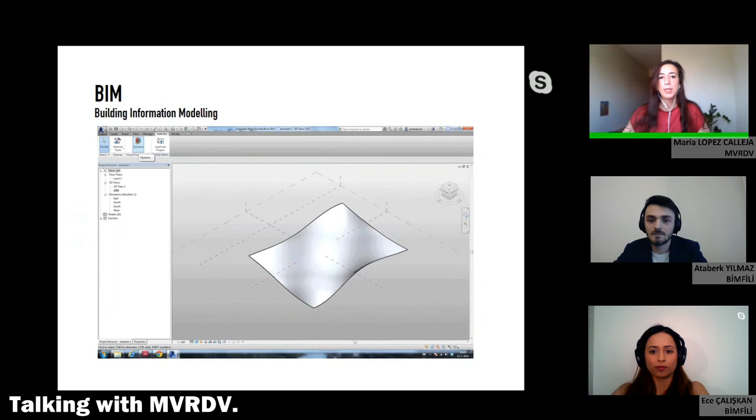So I would like to explain to everyone what BIM means for MVRDV, with 4 main keys. One is to define it as data, because for us BIM is a datascape model, and we have to understand it as a data-driven or parametric design engine. All the parameters we take into account in our design will be noise, footprint, daylight, FAR, or energy.

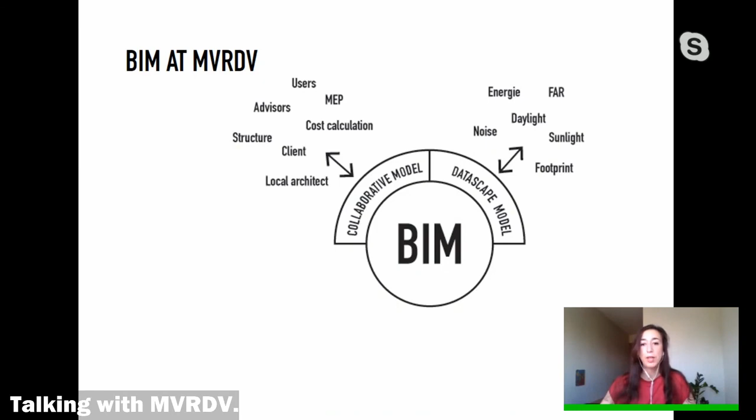BIM is also for us collaboration. BIM is a collaborative model in the sense that the clients, the local architects, advisors are working together. And even at the internal level in MVRDV, we experience how BIM has been promoting collaboration among project team members.

And BIM is also dynamic. It's a dynamic model in which the building's elements are intelligently connected to each other and will update automatically every related component. One of the other key components of BIM for us is simulation. We can simulate and assess the design before construction to understand it better at a much earlier stage.

So these definitions, I would like to try to explain to you by showing, as I said before, a series of older and more recent projects from MVRDV. Let's start with BIM as a datascape model.

It's really important to say that central to the belief of MVRDV's method is that design consists of a large degree of quantifiable parameters that influence or even define the architect's work. BIM is also a data-driven parametric design engine, and as I said before, the datascape for us will consist of data.

For me personally, this is one of the best examples to explain it. I will show you, as I said, all the projects. This is from 1999, and I would like to show you which parameters I explained here are the ones that were defining the design and this datascape.

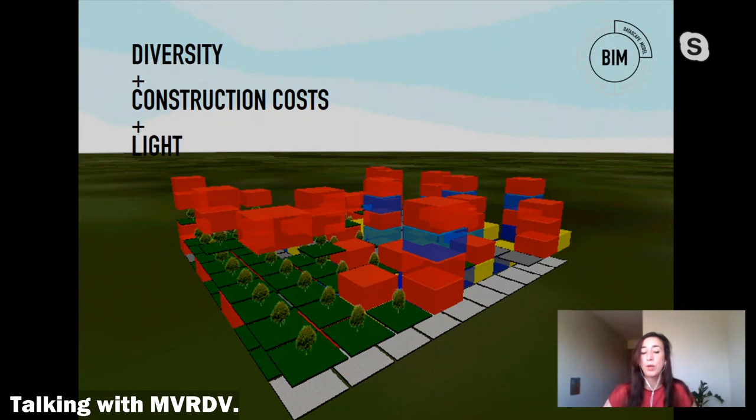So we could choose if people, designers, inhabitants or clients wanted more diversity in the design, consider the impact on construction cost, or study light issues or noise—we were doing our own software for that. We also developed a similar software to bring future inhabitants into the process, which was really important for us.

So in this case, they were really voting about the communal courtyard. They were part of the design, actually—really defining the size of the parcel and choosing the specific landscape.

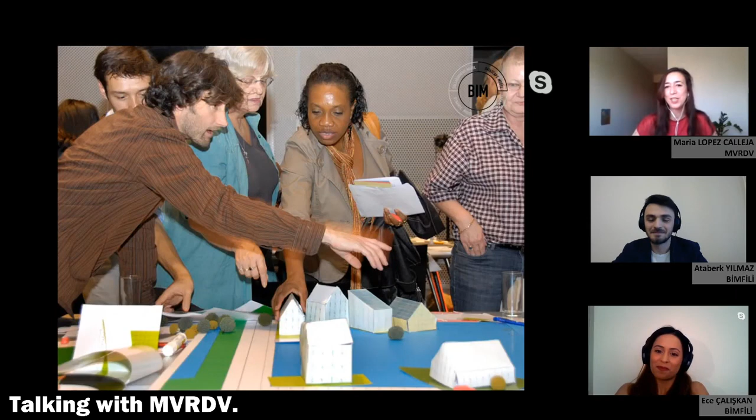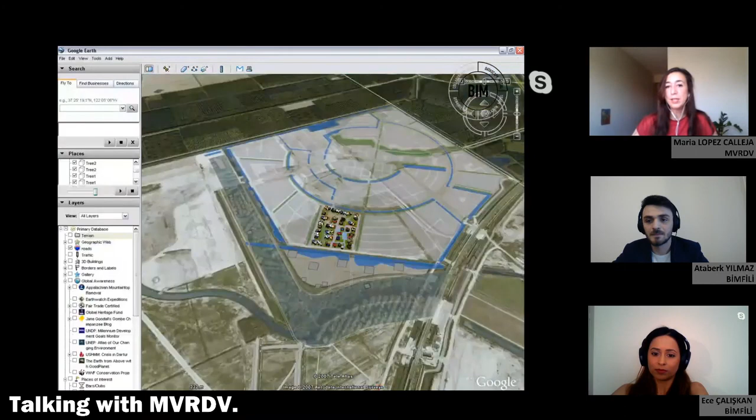Back then the interface was different from nowadays, but people could go to the website and choose the basic volume and customize it. They could even choose the specific landscape, go to Google Earth, and see the result of this future master plan, and how their own decisions could influence the neighborhood. We developed this web tool for that.

It looks like a very democratic process. Yeah, indeed, it should always be like that.

These are some of the pictures, the general ones. And we went a bit further—this is an open software, the Village Maker.

So we had several parameters to take into account, and then we could set the criteria for the design. We can choose the typology, the view, the sunlight, the privacy, price range, location, access, and then end up with different scenarios of how this future vertical village could look.

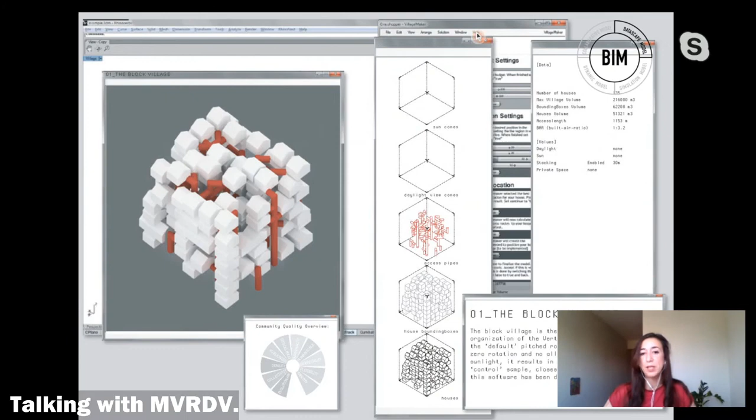Through the software, people could really choose even extreme scenarios, going from the most primitive way to organize it—the default pitched-style houses with zero rotation—to different configurations allowing certain views, single daylight, or even 30 minutes of sun in the morning or afternoon, getting different configurations of what this vertical village could be.

And then it was open software people could access to. I think I'm also showing some models that we were showing in this case in Hamburg. But then we also try to apply this for urban scale, and this was an example I'd like to show because you can understand how we proceed with this methodology at MVRDV. For us, it's really important, this step-by-step story that can give the arguments to define the design.

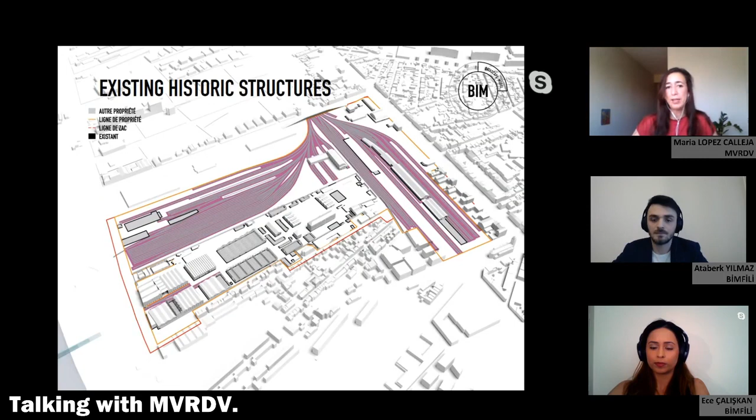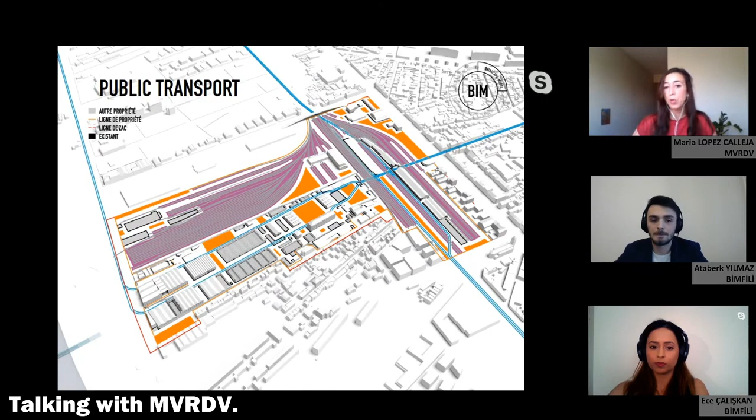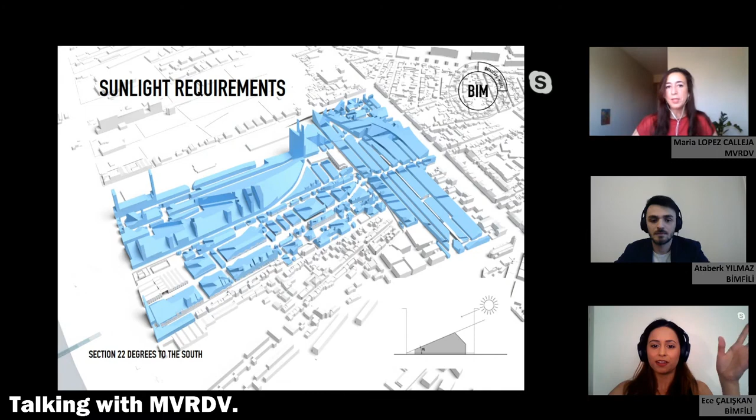So for example, here, we were in the project in Bordeaux, we were checking which were the existing historic structures. Then we were maximizing to densify it, taking into account the public transport. We extrude all the area 100 meters, and then we started to apply all the sunlight requirements for the master plan. The scale of the projects are changing from a single house to community, then to city scale.

Today, city information modeling is a very hot topic. What do you think about city information modeling and its relation with BIM?

Yeah, that's indeed really important. In a way, it facilitates our work. We can be more accurate, we can be more sensitive with the different locations, and nowadays we have to deal with really difficult contexts sometimes. So it's really good if we can get that connection. In our urban studio, we have software like Esri CityEngine, so we can really explore and get the proper information for our designs. Okay, thank you.

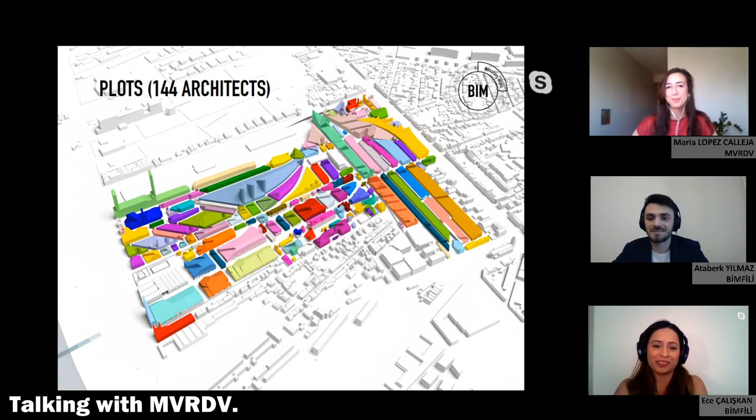Well, and then that's something where we provide natural ventilation, and that was some of the examples I wanted to show you about the Datascape model.

But then let's talk about how collaboration works in BIM. For us, it's really important, this process of negotiation. At the end, we need to really deal with the different parties and get the best result for the design. And for that, BIM, this real-time collaboration with the clients, with the advisors, with the experts, is something that can help us manage the desires of the different parties involved. We can confront all these different desires at a really early stage of the project. What's really important is that at the end we don't get surprised, because the cost failures can be significantly reduced.

And then I thought one of the best examples of this collaboration, I already showed you inside MVRDV. I would like to show you also a full MVRDV office. I think one of the best examples of a collaborative model is our own office, MVRDV itself, because of the design process we have, the way that we start, the way that we are strongly research driven, and the way that we deeply collaborate.

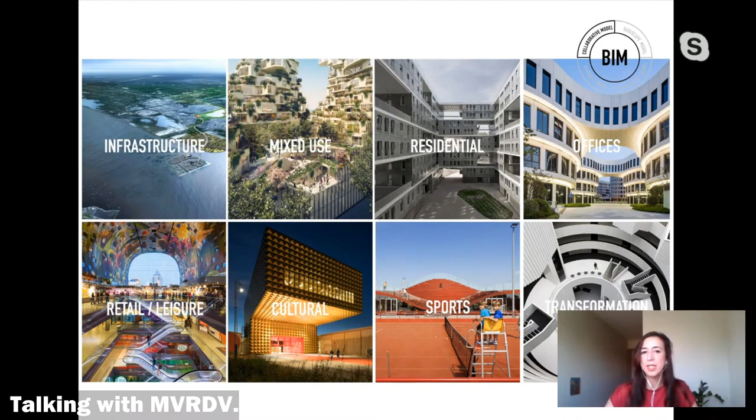So most of you might know, but the MVRDV name comes from our three founders, Winy Maas, Nathalie de Vries, and Jacob van Rijs. This was our office in Rotterdam, also our office in Paris and our office in Shanghai. We do master planning, urban design, architecture, landscape design, and interior architecture, and we have different typologies and challenges like infrastructure, mixed-use, residential, offices, cultural, sports, transformation, and we are global.

We have around 150 projects in 36 countries across 6 continents, and we like to work in flexible working groups. This is how our office was before this situation, and hopefully we'll be back to this soon.

And then I think it's also interesting for the people following the broadcast: in MVRDV, the project managers, the project leaders, the architects, and the interns are all working together. So the process is bottom-up, and everybody can bring ideas. For example, the BIM model allows the project leader and the architect or the intern to work together in one model. This really makes it easy to divide the work, and it really stimulates the collaboration and makes the workflow much more efficient.

And we like to test. We like to see which are the different possibilities, which are the different design options. And then it's really important to have this data overview that will help us make proper decisions about which will be the main directions of the design.

And at the end, MVRDV is just one part of the big collaboration. We have different partners in many projects, so not only internally, but also with our partners, collaboration is really important. We have projects all over the world, and this is a project in the Netherlands, in Almere. This is, for me, also an example from before we started with BIM that shows how MVRDV likes to collaborate.

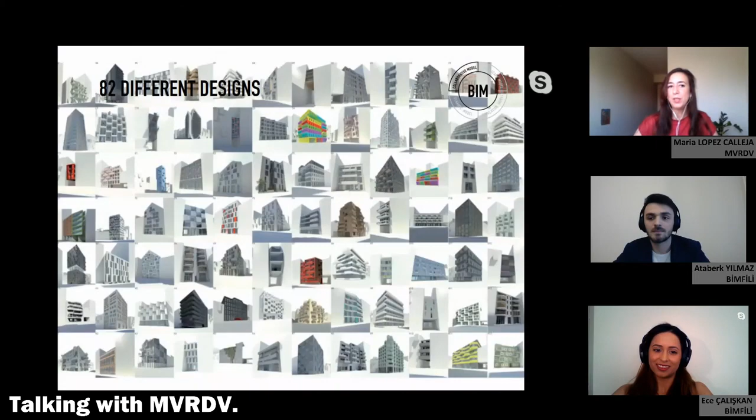One of the nicest parts, we invite other architects to be part of the design. So it was MVRDV plus 25 international architects, from more conceptual to more traditional ones, that will ensure the diversity of our design. We did not have BIM at that time, we did not have so many platforms.

So we met all together to discuss it. Here you have clients, we have the 25 different architects that I mentioned, also the construction team. So we could already take decisions from the design quite early.

It's good to hear that you work as a team rather than establishing a hard hierarchy between colleagues. Actually, no, we have to, I think that's the way. We also know that many times we need the expertise from other partners, and that should always be integrated into our design.

These are some examples of the result of this diversity in Olympiakwartier.

I want to explain how MVRDV got started in BIM. I remember we started to get calls already like 7 years ago, other partners asking, are you already working in BIM? Which software are you using? At that time, these were some of the statistics of the adoption of BIM.

One of the main first questions was: our partners want to collaborate, but which software, which tool are we going to use? To be honest, we were already confident using Autodesk products, and we also realized that because of the download statistics, Revit was one of the most used softwares. So we started to use Revit at that moment.

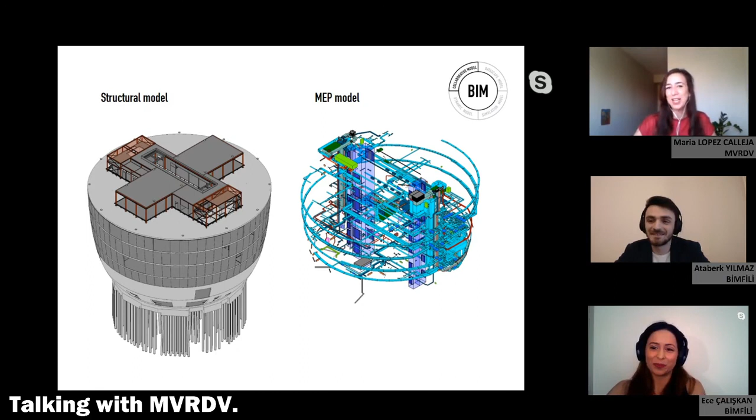Especially in a process like the depot, you see how the structural model, the MEP model, and the central model developed, and how much information was already included there.

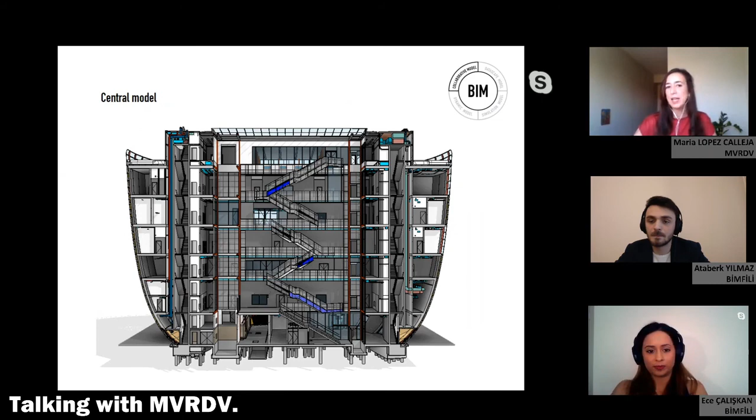It's also important for people to know you detail your BIM model differently depending on the stage you're working on, getting many inputs from different parties. It's not only about geometry, it's also about data that has to be included in the BIM model, and then outputs like sections and all the details you can get.

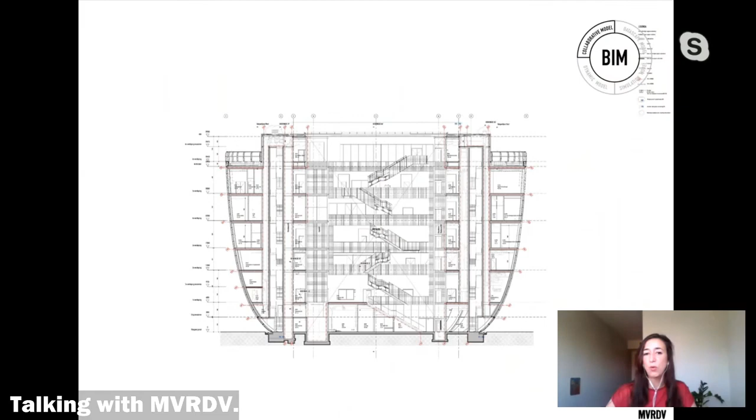The schedules - we love being able to organize all the data in your own design, and face conflicts with clash detection, as you can see here, so you can directly discuss with the structural or MEP people which conflicts exist in the project.

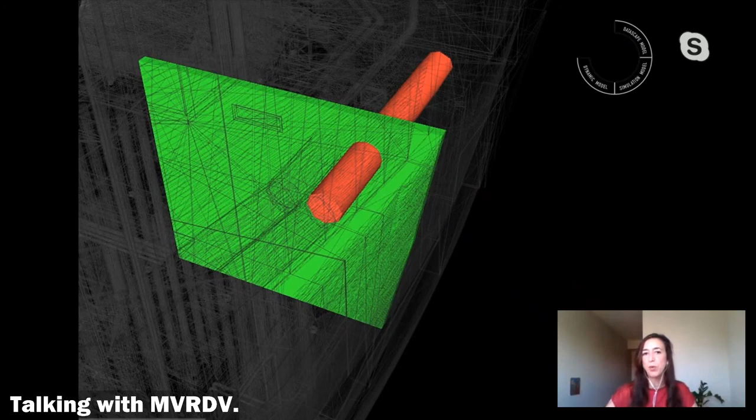This is a summary for the depot, where we could get all the different outputs - visualizations, routing details, clash detection, MEP, or facade - from a unique model. We were also doing some scripting that helped us work smart with the facade.

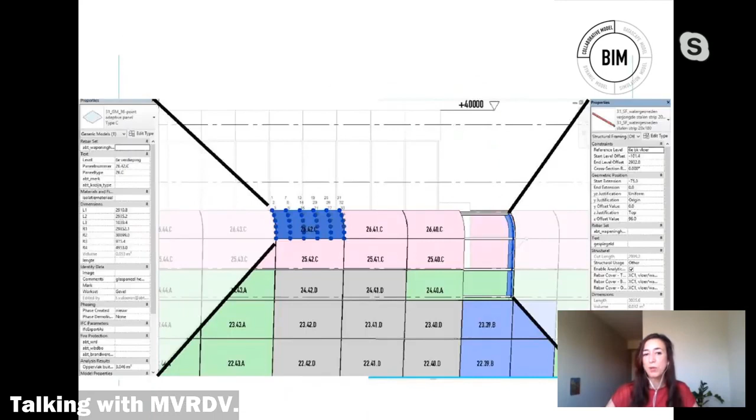This is one example of how we worked on it in our Revit model - how we panelized it, how we got the mock-up and different details of the project. This picture was taken during the process.

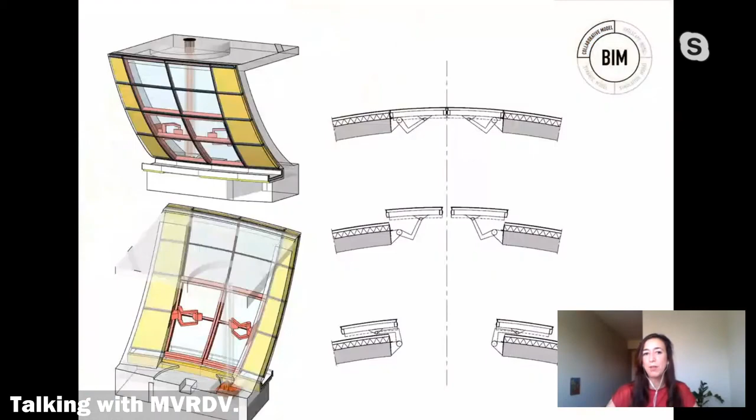We can really see how the facade was designed with this gradient to allow visuals between the indoor and outdoor. These show some of the process - how the renders were made and how we realized and materialized our ideas.

This is the mock-up of the doors. It's really interesting - they open like tram doors, pushing out and sliding, because we wanted to keep the entire facade aligned.

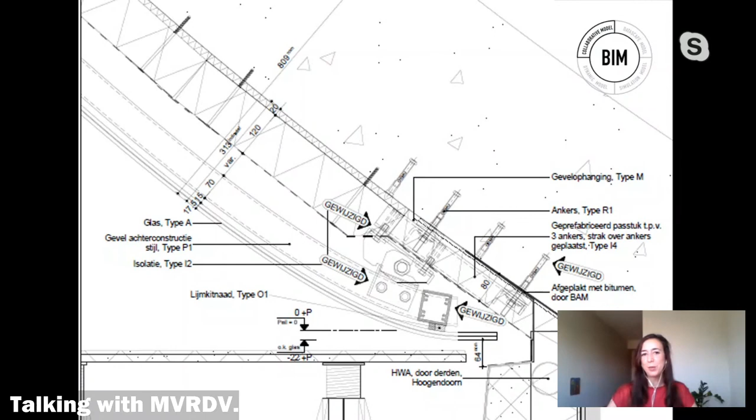And then these are the renders, how the construction started, more details we get there, how to solve it. I'm happy to see how it is nowadays, how it's finalized, and this is one of the last pictures we published in Rotterdam. I cannot point it out, but our office is somewhere there in the city. So really glad to share our project.

I found it very innovative to reflect the city or the image onto the building. Yeah, I think at the end, well, there was already a really nice space, a great location, so we thought that was a way to reflect the beauty of the site.

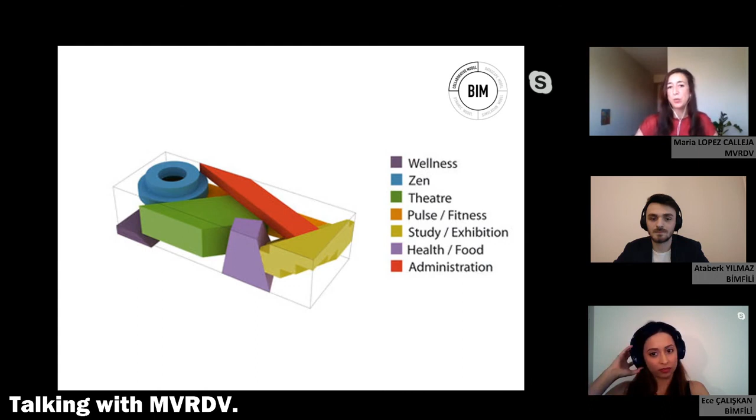Okay, well, now we were in the Netherlands, in Rotterdam, we moved to Denmark. This is one of the first projects, I have to say, when we started to work in BIM - other countries, like northern countries, were a step further than us. So here we were collaborating with ADEPT in Denmark, and they were already working in BIM. In a way, it was good for us to push to move also to a BIM process. So this was really one of our first models in BIM. Here you could say we still were splitting the model.

We could show the structure, the MEP, all the different parties. Here we also integrated - it was really important for us to have the client, the future inhabitants, there. These were some of the images. These days we were using Revit cloud, so we were rendering in the cloud, and it's nice to see how close it was to the final images.

And then I added this project because I think this is one of the examples I can show you of how these days we also deal with collaboration working from home. Because in Moscow, Russia, we were trying to implement BIM 360 from Autodesk, so all the parties are working in the cloud, in the platform.

Well, the Red 7, we tried to give a new addition to the center of the city that will contribute to the great character that the city of Moscow has. So this is one of the diagrams that shows the location.

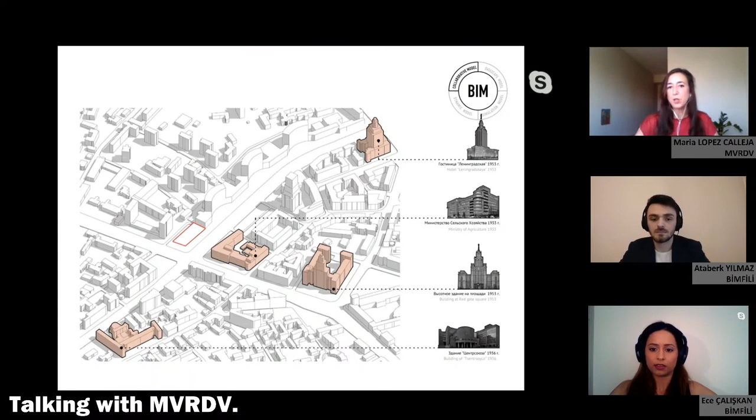This I like to show, it's kind of the story of our project - how we move from the brief, from the program, how we create the different entrances, views, the sunlight, the corners and the windows, and then we shape our building through these different parameters. In a way, our concept was inspired by these silhouettes that go across the city of Moscow. And this was the result of our project, that is now under construction. So I hope you like to see it.

This is an overview of the project stakeholders. In BIM 360, what we found easy was to configure and implement. It improves a lot the collaboration because everyone is working in the same model in the cloud, and then it increases the productivity and real-time visibility. It's also nice how much we can control the access, at the project and folder level.

The access can also be defined by the company, or by the role of the user. The data, that's something I also like a lot - many times we have, for example, project managers who are not much into the software, but tools like BIM 360 let them easily check all the data they need from the model.

Due to coronavirus, everyone has more interest in BIM 360. For those interested, it can be used free of charge until the end of June, by the way. Do you use BIM 360 in all your BIM projects, or is it just for this period?

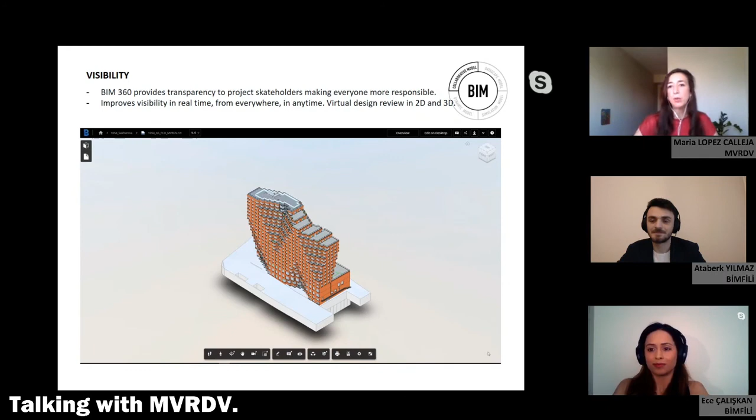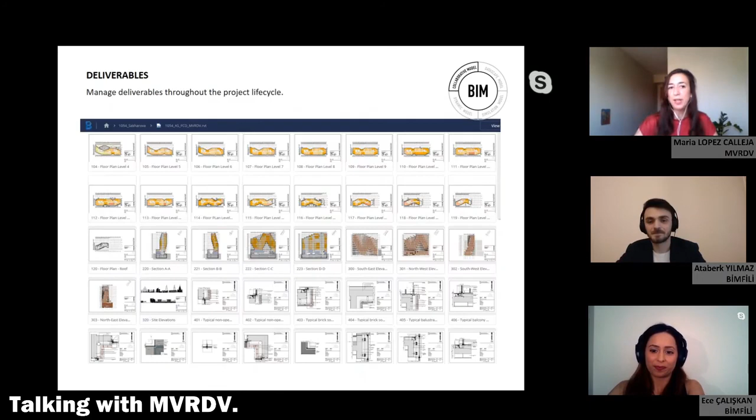And here, just to show some images, how you can see it in the cloud, the overview of all the deliverables. Anyone can easily check all the data. We can go through all the states of visibility and the content.

This was just to show we also integrate Dynamo in our scripts, which could also help us a lot in the design and how to organize our model.

Okay, so I hope you are now convinced that it's a collaborative model, and then I would like to move to a more dynamic model. Because for us, we consider it a dynamic model because it's more fast and accurate.

We see the advantage of having automatic change management, and as I said, building components are intelligently connected. And at the end, this gives us more space for the design.

So I think this project is in a way related to your previous question about Rhino. For example, this was a competition with a really small team that had to be delivered in a really short time. Our colleagues started to model it in Rhino.

And you see, we like to have this diversity. Here we wanted to bring different neighborhoods into the same design and building, these collective houses with communal areas.

And then the team started it with Rhino. So imagine they had many comments from the client that they needed to implement. The team was really small.

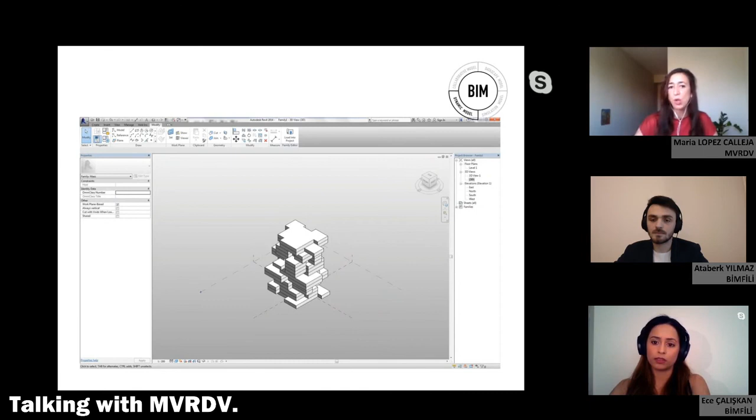I think they were maximum 3 people really into the project, and then they had to submit it quite soon. So we got them on board into Revit.

And then we realized it was impossible to update all of them if they weren't working in Revit. That was a way to organize the team to work in the same model and achieve the best design.

And this was the last one of the images we presented.

Yeah, I mean, this is actually the reason why most architectural firms start using BIM. BIM is a very broad concept. Unfortunately, it is perceived just as Revit and as a dynamic model. But thanks to you, today we have seen many different aspects. And there's more to come.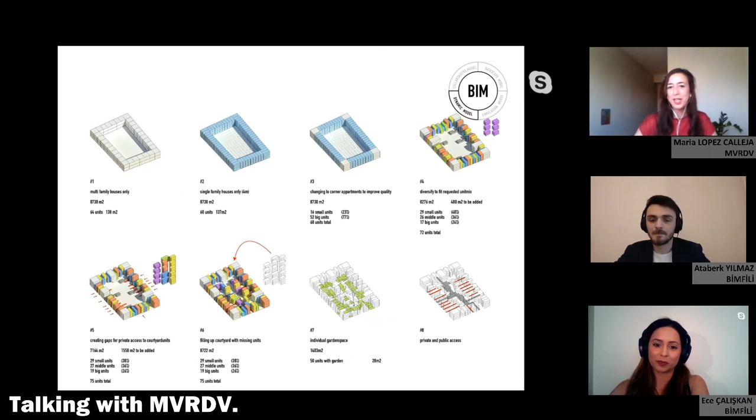I will. Thanks. So, I was working on this project. We had some challenges in this one that I wanted to share, because in this case we were working with 16 different housing types. We wanted to create a variety in the urban space.

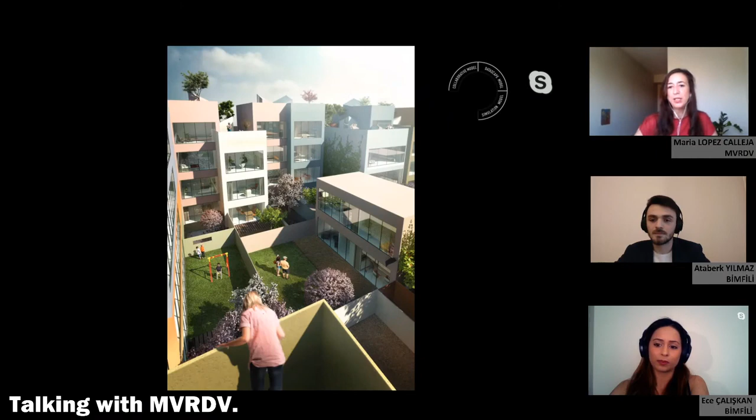And then while we were trying to offer the quality of a green and intimate village, each typology that we delivered at the end had to conform to this unique master plan area here.

This time we had some problems on how to deal with that and how to work and collaborate. So in a more practical way, most of you will know that in Revit, working with groups is quite tedious sometimes, so you have to be careful.

And then in this case, we were using work sets to control who owned the different elements. So we avoided the moment where you're working in group mode and then can't save because someone else is owning the element.

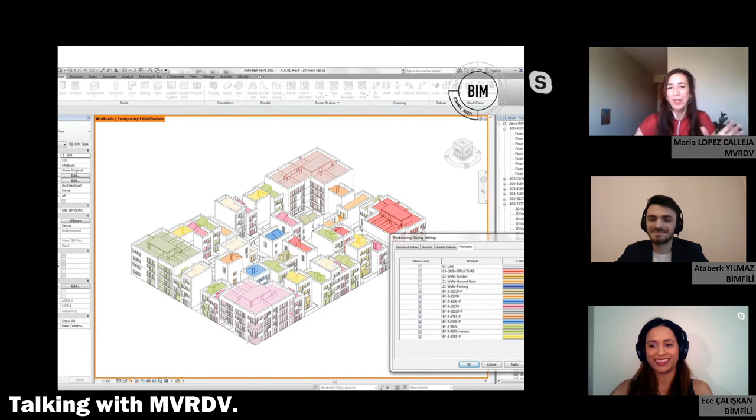So practical things that were a big challenge, but at the end were really useful for us in terms of how to coordinate the work and the design, and also how to give this variety in a really proper way.

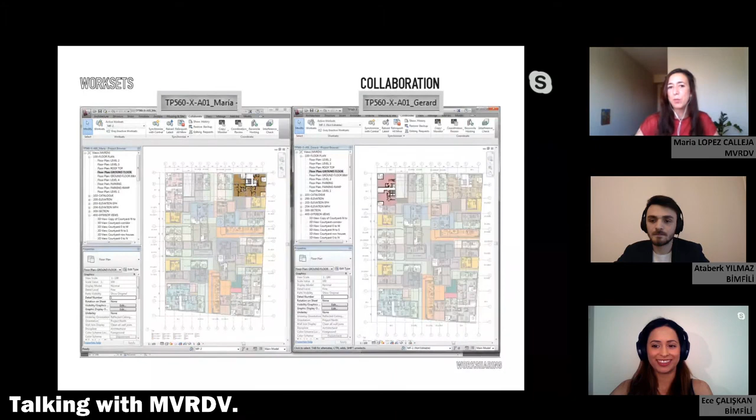These were some examples of how we organized it, and how automatically any change in any typology was automatically updated in the model. This project really shows why you need a BIM manager, actually.

I think the project interprets the flowers of Netherlands into the project, I guess. Sure.

Okay, the last part, but also really interesting, is how BIM works as a simulation model. As I said before, we have to get into more and more complex buildings and existing situations. BIM helps us simulate and assess the design at an earlier stage through these virtual prototypes we get.

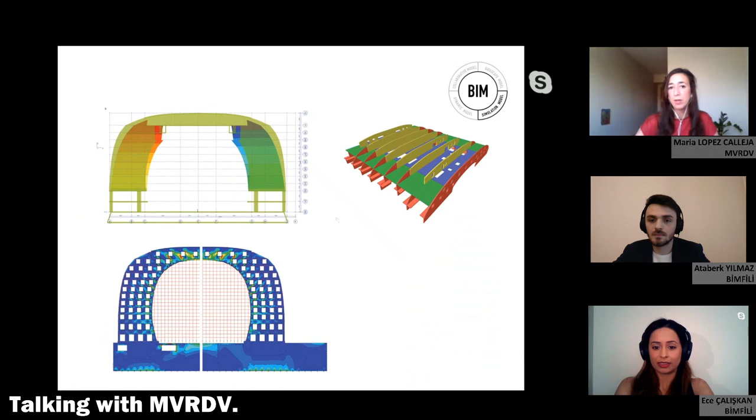Since you mentioned this is the first project you used BIM, how do you compare this project specifically to the projects before it?

Well, now on one side people are more experienced, so we deal with fewer challenges about training the team. I think there are many ways now to solve many of these difficulties. For example, in this case we were working in BIM, but it was in a later stage, not as early as we would like. Now we try to keep most of our projects from concept to realization in BIM.

Before it was a bit complicated. I think it was a mix of not all our partners already collaborating in BIM, and not all our colleagues already trained in BIM. In a way the software has also improved a lot. I think scripting software like Dynamo is also helping us speed up the process.

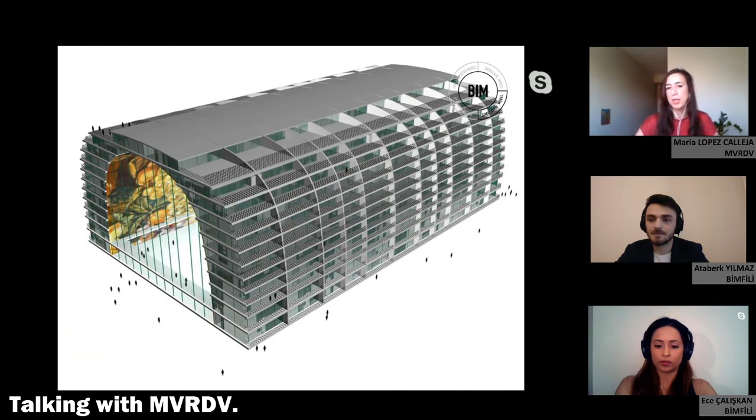Thank you. Okay, another project to show this simulation, the cultural cluster of Zaandam. Here, just to quickly show how we designed this silhouette of the new house in Zaandam. These are some of the renders.

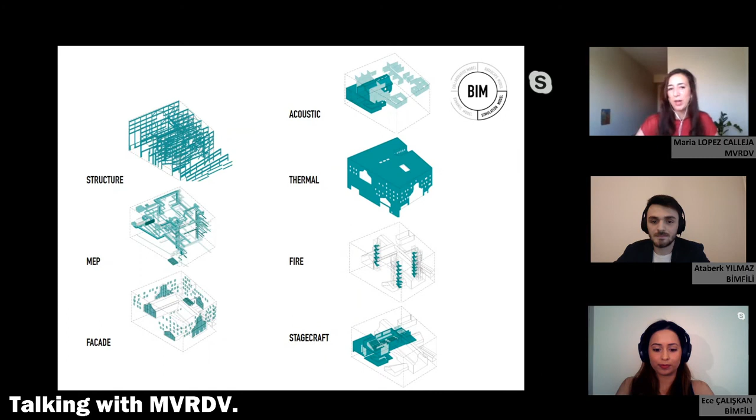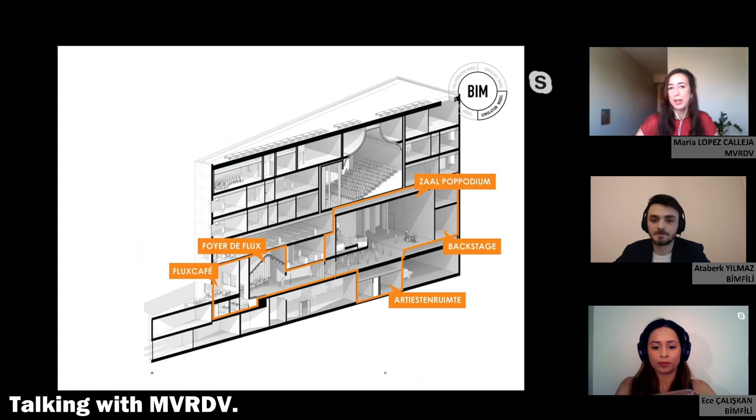What was really nice, and I'd like to show, is how much this helped explain this, in a way, complex program to the client and the different parties. All the sections I'm going to show you are coming directly from Revit, so you can really explore the entire building in an easy way. This is a really good tool to assess the project.

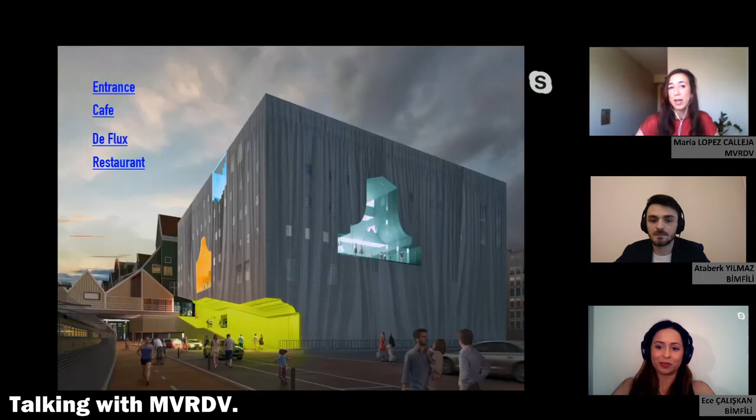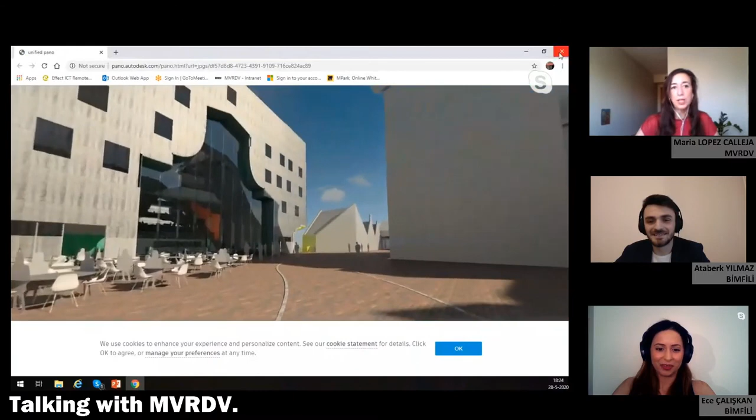I don't know if that will work, I'll check it. I think I need to move it here. We were also using the views, that was really helpful for the parties to check it. I think I can also show you, we could go through the restaurant and different spaces. This is great for the clients especially, you can see the essence of the office, the use of color.

Sorry, now I think, oops. Oh, I think it crashed. Okay. Give me a second. No problem, no problem.

At that time we were using, I think, 360 degree panoramic views rendered in the cloud. But for a while now we've been using virtual reality glasses, and we have VR sessions that really help for the BIM meeting. You really get the client and other parties involved, so they can really see how the project is continuing. This will be much more common in the future especially.

Even now some of our clients have started to ask, can we see it in 3-dimensional? Yes, we are preparing some renders or animations, but they are not enough now. I also realize that for people afraid of heights, when doing a high-rise project, you also need to take care where you're looking. It's quite impressive to see the feeling, how real it is.

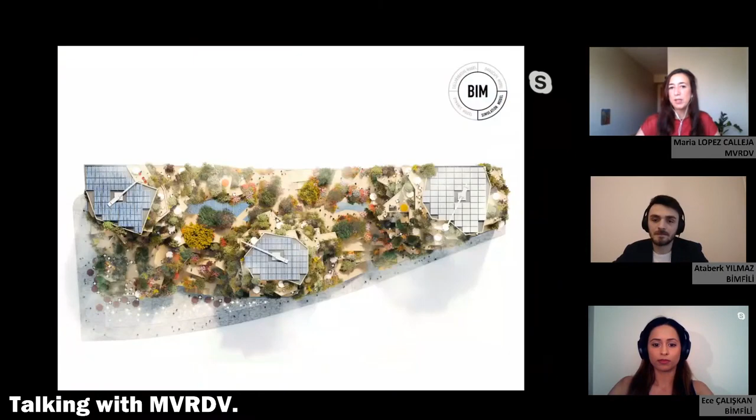But we wanted to give the human scale to the terraces, to the green. Here you can see some pictures of the different terraces and the variety. These are just some examples of how we deal with the diagrams about sunlight and the living areas.

This is kind of a scheme or summary made for the BIM process, so here was a mix of the software. We started the concept design, the team began it with Rhino and Grasshopper, but then they asked to also move this to Revit. That was too complex also to look at with all the typologies and the different terraces and conditions.

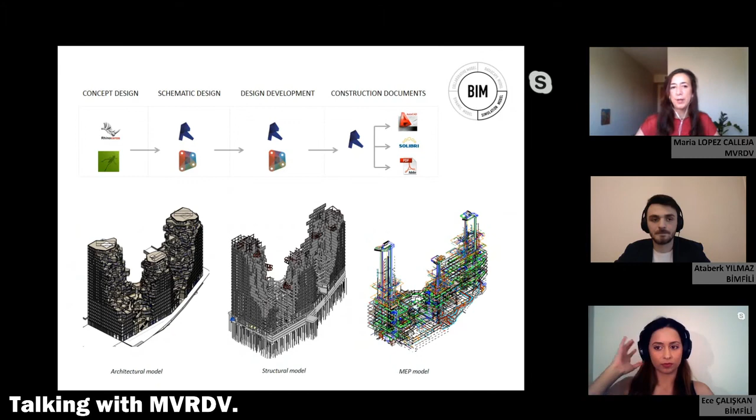So from the schematic design on, we moved to Revit, and we were using Dynamo to face some of the challenges. This is how we split the architectural model, so the different towers were separated. Usually when we see that the performance of the software is getting lower, we are dealing with heavy files, we need to split it and organize it internally. That was an example to show it.

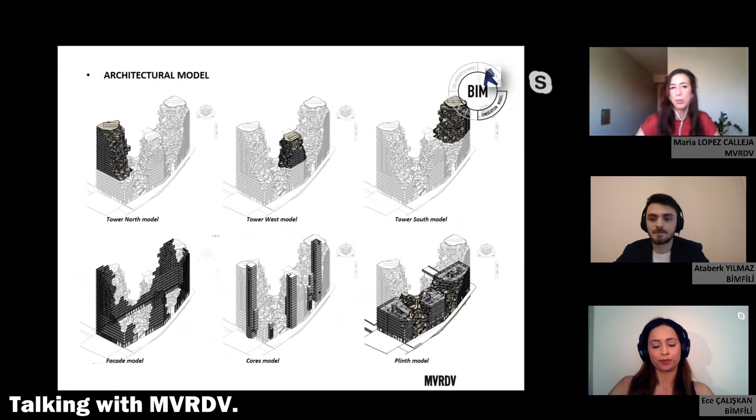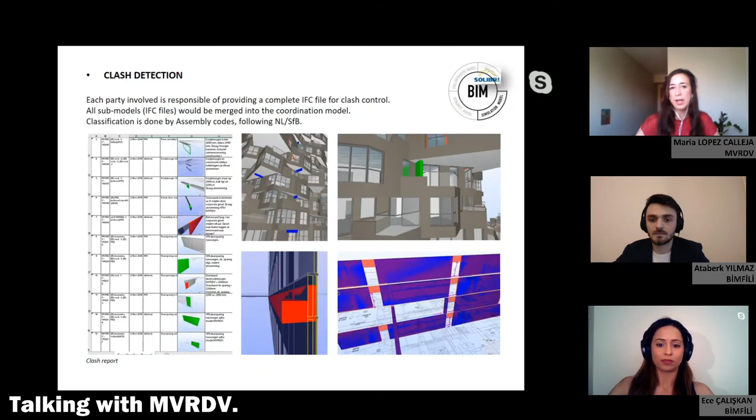And then it was nice to see all this data that we can get, even with the complexity and diversity of the program, how we can deal with clash detection, so we can point out which areas conflict. We were using scripting, especially to face these shapes, which were really self-expressive, and the pattern.

And at the end, the design has to be realized, we need to optimize it. So we also helped ourselves with different scripts to do it.

I won't go into detail, but we were using a way to find the walls that were creating the valid geometry. Then we create this solid geometry, isolate it, and isolate the outer facade, creating this pattern generator. This is one of the scripts that brings us back to Rhino, and we get all the different panels for the facade.

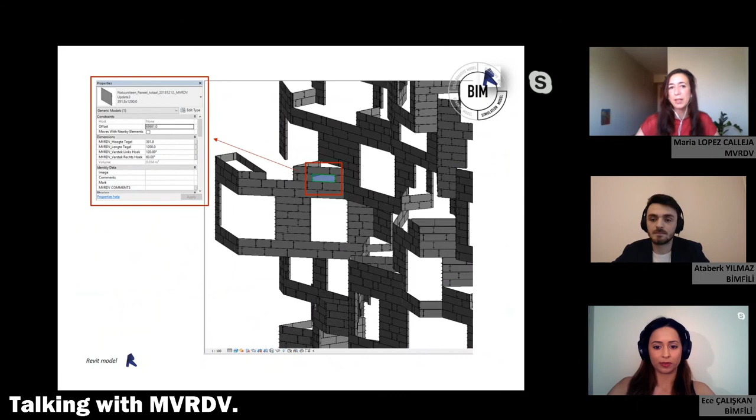I tried to explain the four keys that I mentioned, that for us BIM is a Datascape model, collaborative model, dynamic model, and simulation model. I hope you agree with most of the points that I mentioned, and I hope it inspired you. Thank you very much, and I'm looking forward to the questions of the people looking to us.